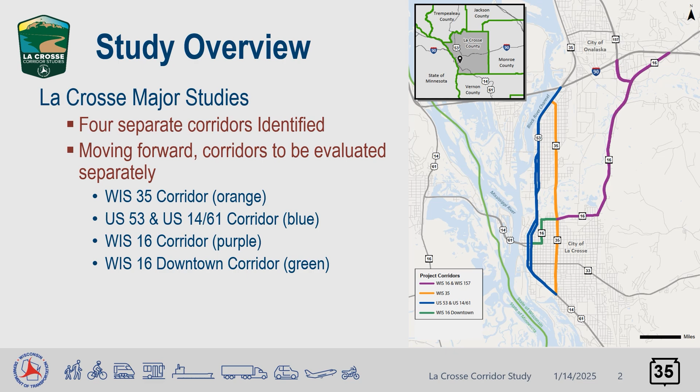The limits of the WIS 35 corridor study are from US 14/61 in the south to US 53 in the north, a length of approximately 4.8 miles. Because of recent improvements made on both ends of the study area, highlighted in red on the map, the proposed construction limits are from Barlow Street in the south to Cunningham Street in the north. The scope of this study is to identify alternatives that improve safety and multimodal facilities while addressing pavement, bridge, and utility infrastructure needs. WIS 35 carries several local street names within the study limits, including West Avenue, Lang Drive, and George Street. For the purposes of this study, we will refer to the entire study corridor as WIS 35.

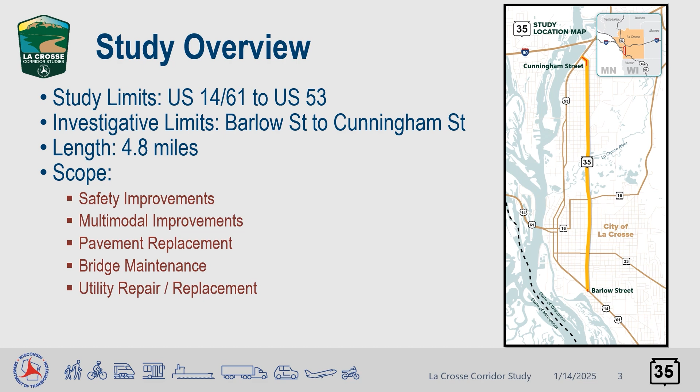A key component of a corridor study is the development of a purpose and need statement, which provides a concise description of the objectives of a project. This statement can change over the course of the study as new information becomes available. The purpose and need statement for the WIS 35 study has been modified from the version that was presented at the first public involvement meeting in February. The changes were minor, and the primary needs for the study have not changed. The current statement reads: the purpose of the WIS 35 project is to improve the utility of WIS 35 for all travelers by addressing safety, corridor infrastructure deterioration, and multimodal access and connectivity.

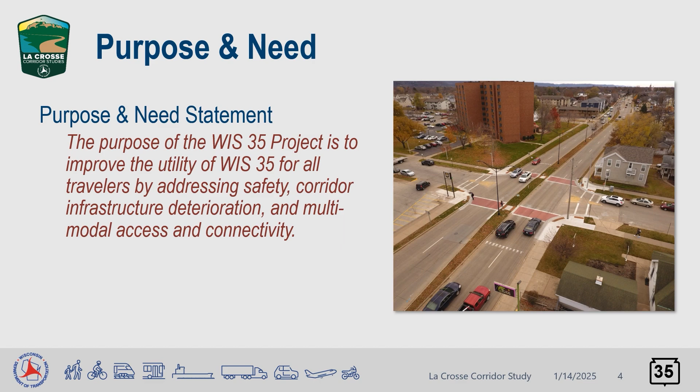The identified needs of the WIS 35 corridor fit into 3 categories: safety, infrastructure, and multimodal facilities. The primary purpose of the study is safety improvement. 75% of the corridor and more than 10 corridor intersections have been flagged for safety concerns. Bicycle and pedestrian safety concerns were also identified throughout the corridor. Corridor infrastructure is another area of need, with 60% of pavement sections in need of replacement and the remainder in need of resurfacing. In addition, 2 bridges are due for rehabilitation and several sections of utilities require replacement. Finally, multimodal facilities were identified as an area of need, including high-stress pedestrian crossings, bicycle facility connectivity, and transit stop amenities. Please refer to the exhibits for more detail on these needs.

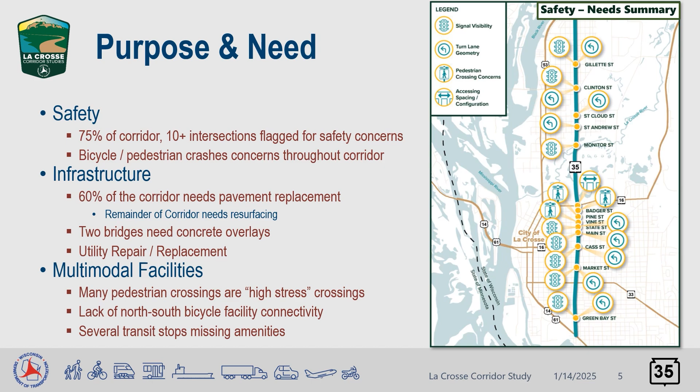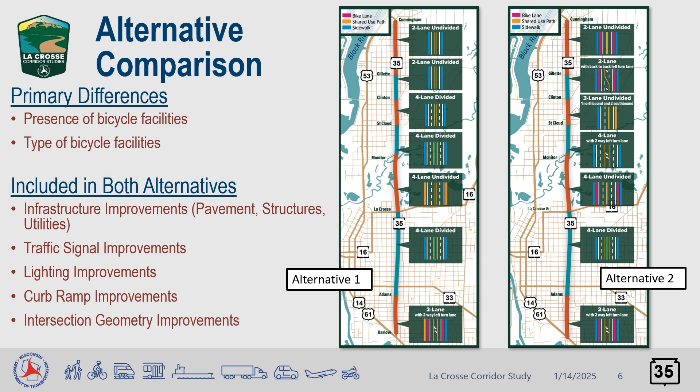2 alternatives were developed to address the project purpose and need. These alternatives have only minor differences in the number of lanes throughout the corridor. The primary difference between alternatives is the presence and type of bicycle facilities throughout the corridor. Alternative 1 includes fewer bicycle facilities than Alternative 2, and those facilities tend to be shared bicycle and pedestrian facilities. Alternative 2 includes more bicycle facilities than Alternative 1, and those facilities tend to be dedicated bicycle facilities. Both alternatives include infrastructure improvements, traffic signal and lighting improvements, curb ramp improvements, and intersection geometry improvements. Please review the Improvement Alternative Highlights exhibit for more details or consult a WisDOT representative with any questions.

The alternatives were screened using 6 criteria as a tool to determine which alternative best meets the study purpose and need. The first, safety, evaluated the safety performance of each alternative for all travel modes, including bicycle and pedestrian safety. Factors like the presence and type of bicycle and pedestrian accommodations were evaluated. The mobility criterion refers to how easy it is for roadway users to access their destinations or travel along the corridor and considers factors like motor vehicle delay, backups, removal of parking, and access changes. The impacts associated with each alternative are similar, but were also considered in the screening process. Items that were evaluated included right-of-way acquisition needs, environmental impacts, aesthetic impacts, and others. Construction costs for each alternative were also estimated and compared. And finally, community input is part of the screening process and currently includes feedback from advisory committees and municipalities.

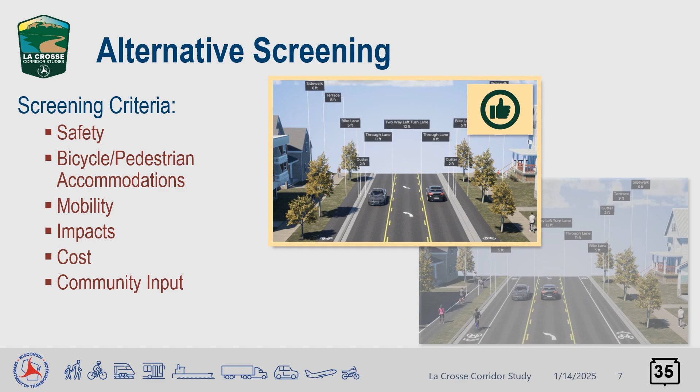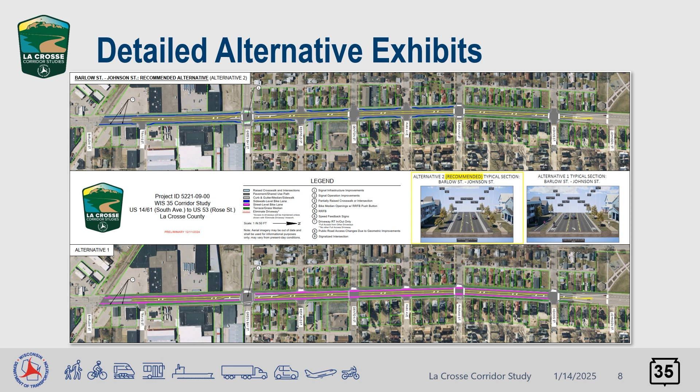The screening results were used to identify a recommended alternative. Input from this public meeting will be incorporated in the final screening process to determine what alternative is preferred for WIS 35 to move into the design and construction phases. Please see the exhibits for more screening details, results of the screening process, and identification of the recommended alternative. Detailed plan view exhibits are also available for review. These exhibits show the alternatives under consideration for each roadway section from a top-down map view perspective, alongside the typical section graphics used in previous public involvement. A separate exhibit is shown for each roadway section. These exhibits are formatted so that the recommended alternative is shown on the top row of each exhibit, while the other alternative under consideration is shown on the bottom row of each exhibit.

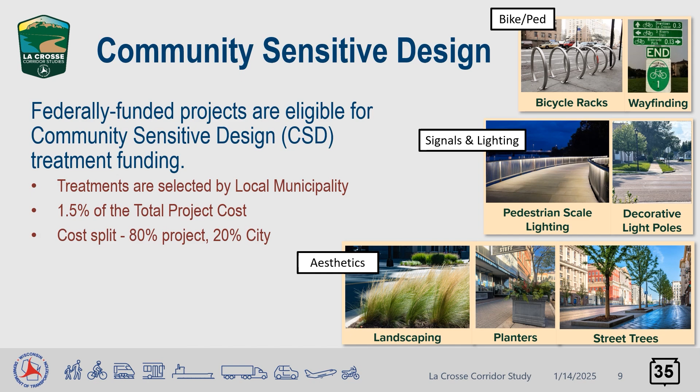The study phase of the WIS 35 project is in its final stages. We are expecting a signed environmental document in the spring of 2025, which will mark the end of the study phase. The environmental document will identify a preferred alternative for the corridor to move into the design and construction phases. Your feedback is essential in helping us select the preferred alternative. The roadway design phase of the project is scheduled to start later in 2025 and will continue into 2028. Pending funding, the earliest that construction could start is 2029.